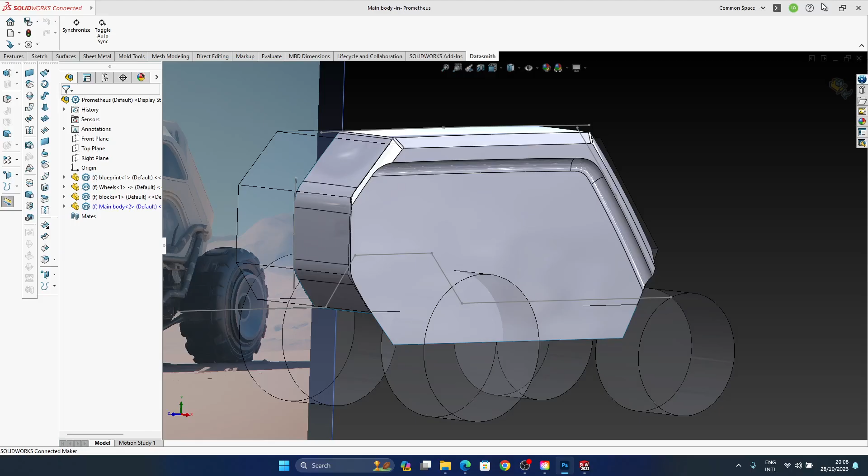So last time we arrived to this point and I was talking about adjusting this thing so that, well, it looks a bit more like this, at least as a main shape. If you don't know how we arrived at this, then check out my previous videos. Today, the main goal would be to get close to the shapes that we have here at the top, with probably a kind of a fillet here, and generally speaking, creating the overall shape to be more or less like our object in here. And we will continue adding more details, more features to it.

And if you would check my previous videos, you would know already that the goal is to get to something similar to this. But of course, I will delete some bits that don't make sense, like these things in the front, some cables on the exterior of the vehicle. Stuff like this I will eliminate, but the goal is to apply our knowledge to create some interesting shapes and to really look nice and to render it afterwards.

Right, so without talking much about the overview, last time we were here, and I remember I finished it with SolidWorks blocked. It managed to unblock itself, which is great. Let's start to do some things. Let's look over the image and try to understand a little bit what's going on. So please forgive my drawing. I will draw with the mouse, so it's not going to look really nice, but it will be sufficient for us to understand what's going on.

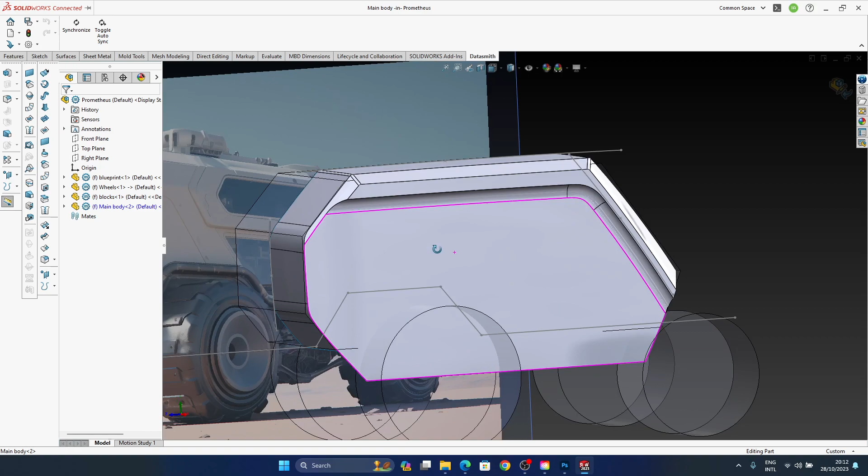Now, I would say that the easiest thing to solve would be the fillet. But the idea behind everything that we've done until now is that we have created some sort of a system that we can modify easily so we can arrive to our goal. That was the whole reason of spending over 2 hours to create a system that will allow us to alter this object within limits, of course, but still be able to adapt. So we don't have to keep reconstructing geometry every time we see that something is not good, especially given that we have one sketch done by AI, nothing from the side, nothing from the top to guide us. So it's very critical to build such a system so that we can modify easily.

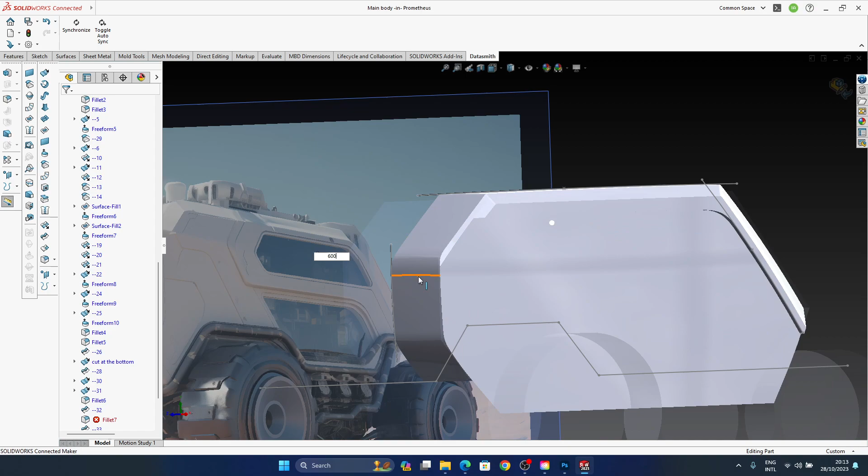Right, so then let's start with the fillet. I think that would be the easiest. So we have a fillet that is at 300 millimeters right now. If we try somewhere around 500 millimeters, as you can see, it starts already to update. I don't think I will keep it at 500, so I will try 600. At some point it will break, of course. Now look, it's clearly not even 600, so 500 will be our limit.

We could get into it and modify. Actually, I think we can modify it, if I remember correctly. So if we apply a freeform modifier to it, and we say this is movable, this is in contact. I think if we keep everything in contact, but we put this one to be movable, then we can modify both tangency handles that we have in here. Oops, SolidWorks does lose the selection. So we can modify the tangent handles in there. We don't need a lot, just slightly, and it should keep the volume nicely.

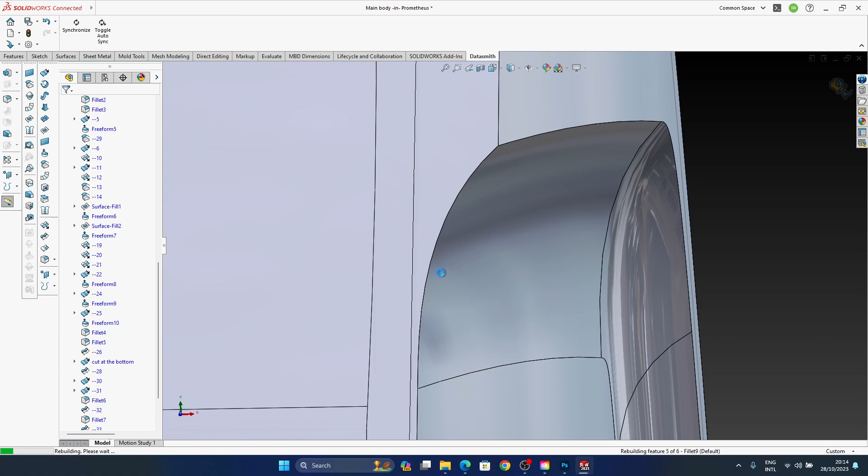Now, even more, I'm just pressing Ctrl Z right now. So even more, just want to be sure, if I am keeping everything in curvature in here, and that should be contact indeed. That is correct.

And yeah, and movable. As you can see, it will allow me to modify only one tangent handle in here, which is still useful in the end, because we can always modify the way that it is fading towards the other one.

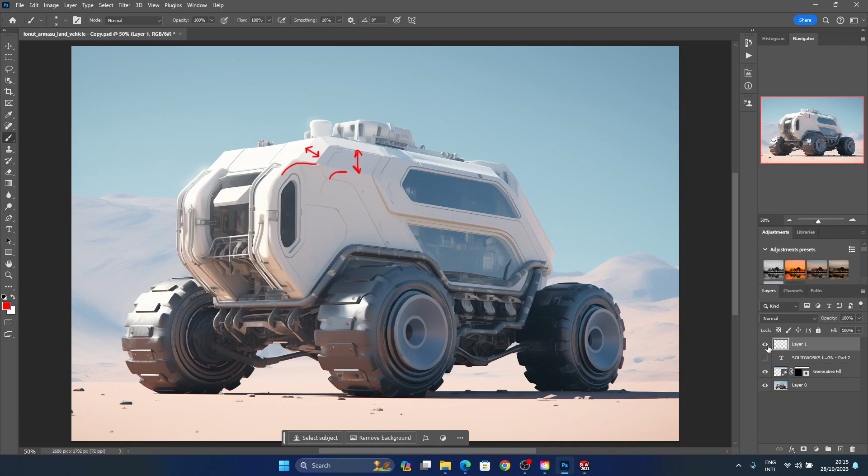However, because this may not be what we need, and because I don't necessarily need such a degree of control, I would just leave it as it is at 500 millimeters as a fillet. I think I went back to 300. Too many Control Z's. Okay, so I'm quite alright with it, especially given that we are quite loose in what we try to achieve.

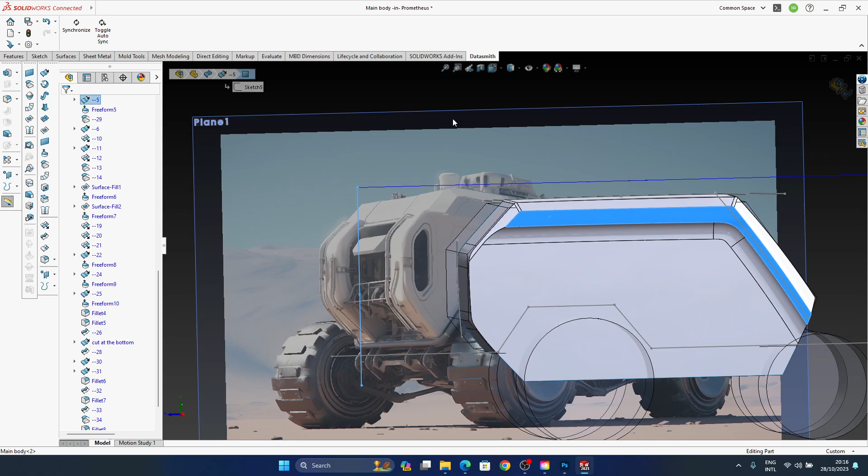Right, so we don't know exactly what is happening in this area here, so we will be kind of free to do whatever we please. The only difference is that we need to make sure that this height in here is what we need. So let's try to get that one done. I remember that the height was governed by an extrude. Yes, so I should have an extrude from which I created this fillet in here.

So let's see, we have the fillet. So I should be able to see parents and children. So one of them, there you go. So it's extrude 30. All right. Oops, not help. Okay, extrude 30. Anyway, so then I have the sketch in here. I will go into the side view of it. I could just modify the sketch.

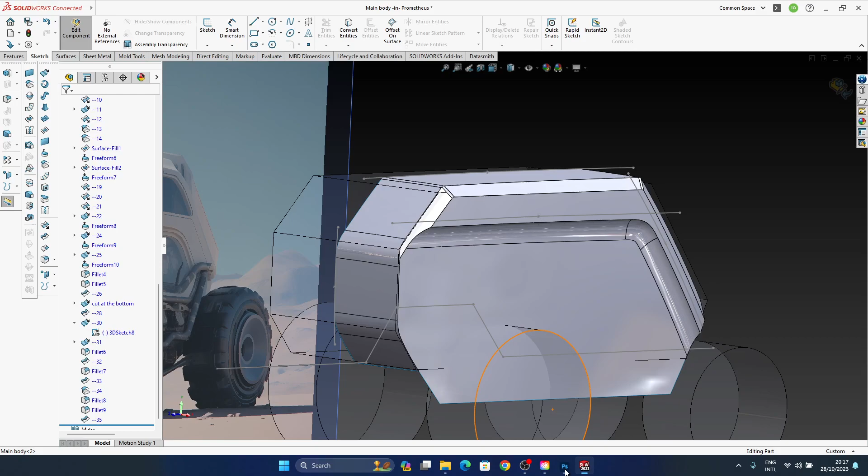Yeah, so I'm going to modify the sketch that I have in here, and I need to make sure that I have a distance that is wide enough. It doesn't need to look exactly like that, but the idea is to be closer to what we have in there. So I would say that this kind of width I'm okay with. It's not perfect, but we don't know the dimensions, we don't have all the views to work with anyway. So definitely this kind of height in here is what we need.

But because of that, this fillet in here goes quite close towards this fillet. So that's not necessarily what we wanted to have. So if I'm going in here, it's extrude number 2. And if I'm modifying this, I should be able to now modify this curve. So if it is too close, then the angle of this curve should be a little bit more abrupt.

Okay, not now, please, Mr. Bitdefender.

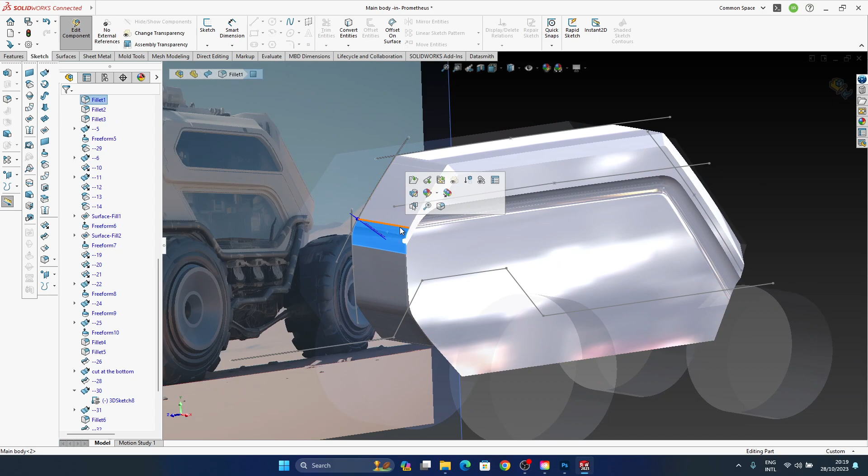Right, so it should be a bit more abrupt. So now by modifying the angle, our fillet is not going so much into this front fillet in here. And by the way, when you have the light hitting the object, you will not perceive this fillet starting from this edge here. So I would say I'm okay with what I have in there. Everything is kind of loose anyway, so as long as we achieve something similar to what we have in here, we should be good to go.

Now, the third thing that I have is this one in here. Okay, let's name it 3. All right, so that would be the third thing that we have. Now, there will be 2 solutions. Either we increase the offset, but that means that we start eating even more from this fillet in here, and I don't like what's happening in here. I don't like this kind of shape. I would like to have a clean shape, not something like this. That's kind of nonsense.

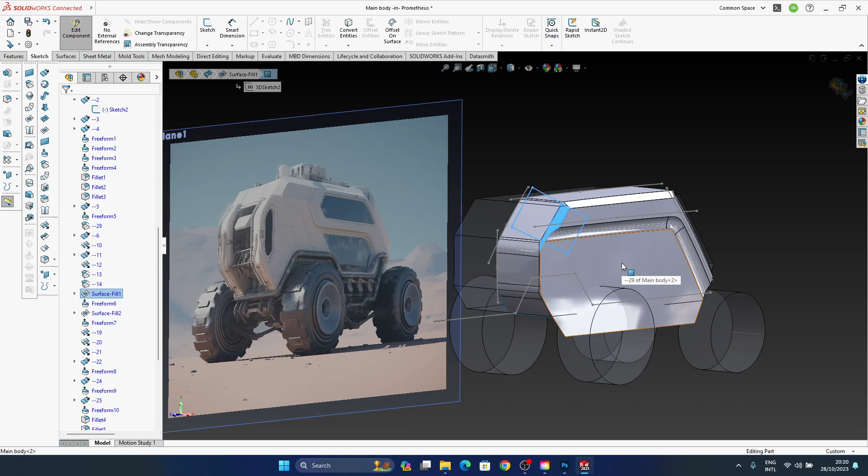Right, so we can increase the offset, because all these surfaces for doing the chamfer are governed by an extrude and an offset as an origin. Or we can modify the angle. The original surface that we extruded in the past had an angle to it. So I remember that I just applied 45 degrees.

Let me see, I have a surface fill, so we should be able to just reduce the angle of it. Okay, so if I'm saying in here, parent, then, oh, interesting, I cannot see. I have a 3D sketch, yeah, I know that. So okay, I found the offset, so we are at offset 13, there you go.

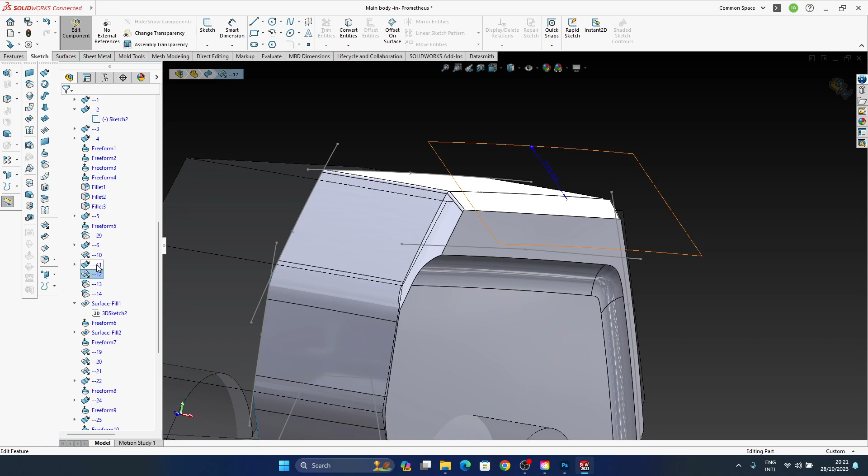Yeah, so I'm having the 2 offsets that I have in here. I'm trying to remember. 2 days passed, and I struggle to remember. So I'm having the 2 offsets in here, whose inputs would obviously be the extrudes. So I have this extrude in here.

So I should be able to see an angle to it. Oh no, that's an extension. This is the extrude. Yeah, good. So I have this extrude in here, 45 degrees. I would say let's reduce it towards 35 degrees. So 35 degrees, and of course it's eating more from what I have in here, but that's fine because then I can reduce the offset.

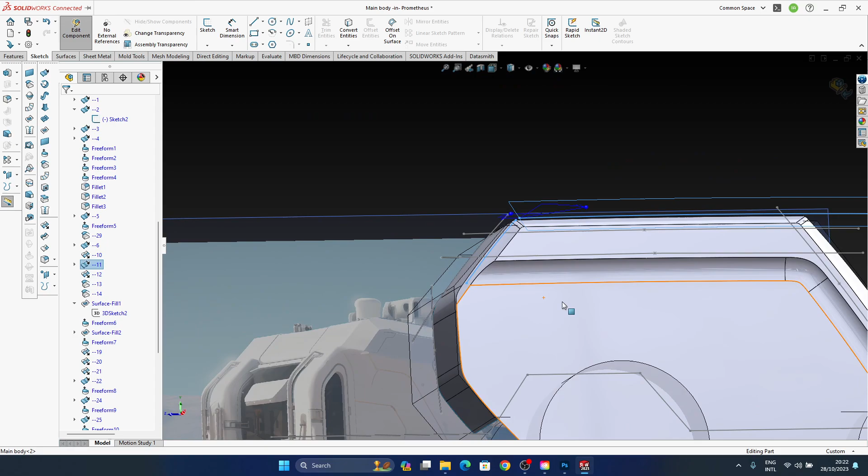Okay, so 35 degrees, I'm not sure, maybe 30 degrees would be a good idea. Maybe we can keep it at 30 degrees because at the end of the day we can always go back and modify it. That's why we have constructed our system in here, so we can modify this without a problem. So 30 degrees on the other surface as well, and there you go. That's cool. So we start to have that wider kind of chamfer in here.

That's good. Now, if I'm offsetting these surfaces back so that I can reduce what's happening in here at the corner, then I'm going to reduce the chamfer. Yeah, so I don't quite like that. So then the only option that is remaining in here would be to modify the offset of this thing. So I would say, I don't know, 180 millimeters. Okay, 180 is not quite it, I don't want to reduce it completely, so I would say 220 maybe.

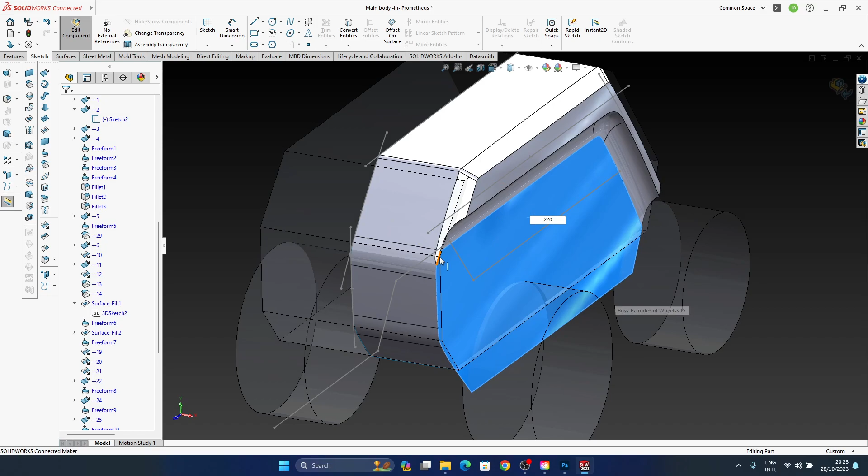Okay, so maybe instead of having it at 30 degrees, maybe I can put it at 35 instead of that. So it's, you know, a combination between the two. Okay, so that gave us this up to here. Now I could create fillets separately and blend them, but that's quite a lot of work for such a geometry, so I don't want that kind of work.

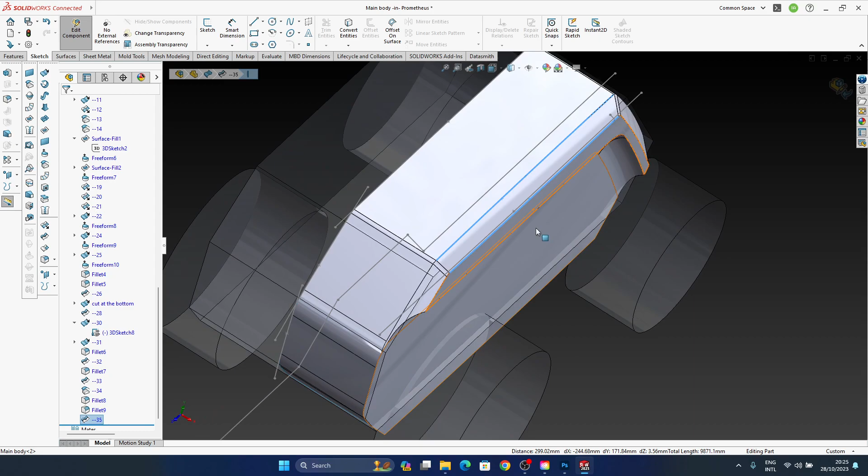I just realize these two curves in here that are going away from each other, so probably we will need to address this to be less visible. But anyway, just continuing with what we have, I don't like the fact that it is finishing in here. I don't want to work so hard for such a surface. So then what can we do is, yeah, increasing, so it will be all three options adjusted so that it is not going to affect us that much.

So 150, I would say in here, maybe 130. So just enough to avoid this in here. 130. Okay, so now it finishes in here, which is what I wanted. I have more or less a wide chamfer in here, not as wide as maybe we wanted.

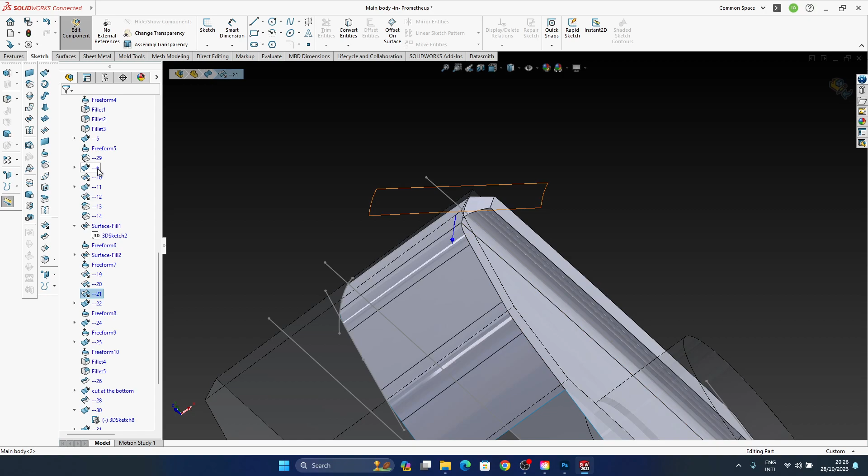I'm just thinking, could I maybe make it wider? Instead of decreasing the angle, maybe increasing it. So the angle is good, but then, yeah, I think we can actually do it. So by decreasing the angle, like 25, for example. I see. So it's the other way around. Okay, so by increasing the angle like 65 there, and then making a bigger offset, yeah, it will give us what we need.

So now instead of 130, 160. There you go. So 160. Okay, so now I think we are exaggerating. Let's see, where is my extrude? So this one, so 65 is a bit too much, from 45 to 65, so 20 degrees, so no. How about 55? Yeah, so 55 looks a lot more like it.

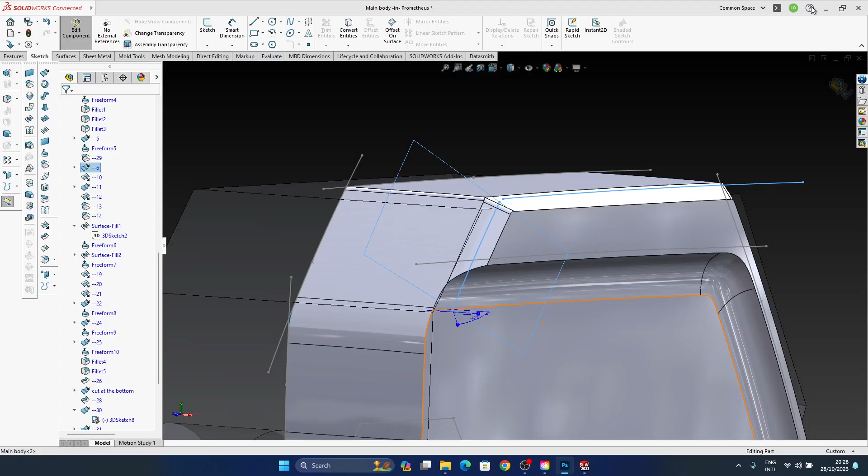And now, well, it's a matter of choice in the end. So now this one I can keep it as it is, and then I can keep this one as it is now, or I can do something slightly different. Yeah, let's do something a little bit different. So instead of, I think I was having 55. Was I having 55? Let me see. Yeah, so 55. We can keep this one at 45, for example.

Not even sure which one it is. I think, yeah. So we can keep this one at 45. Let's see. There you go. Now, of course, these things don't align anymore. So that means that I am forced to increase the offset. Probably 150. So I may go back to whatever I was having before.

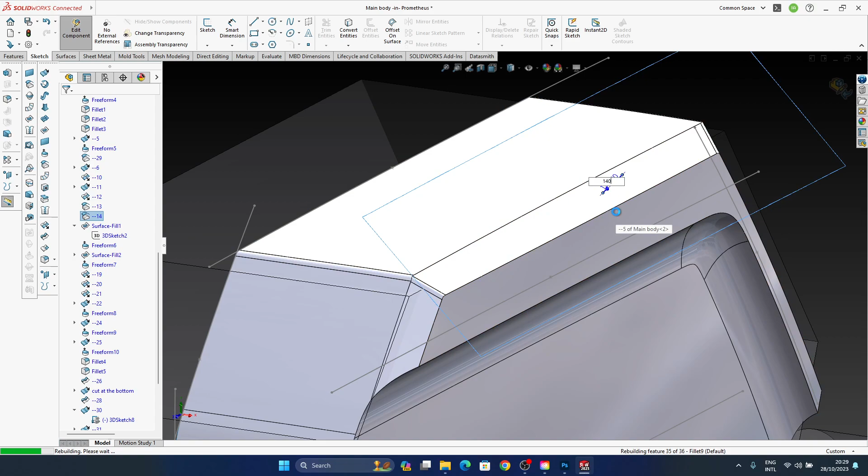I want these two to match a little bit better so that I work less later. So 150, 140. Okay, 145 then. Okay. Yeah, somewhere right there in the middle. And there you go. So now they would be at a different angle value. Yeah. So in this way, it does look wider here. It does look slightly wider there, just like as it would be in the picture.

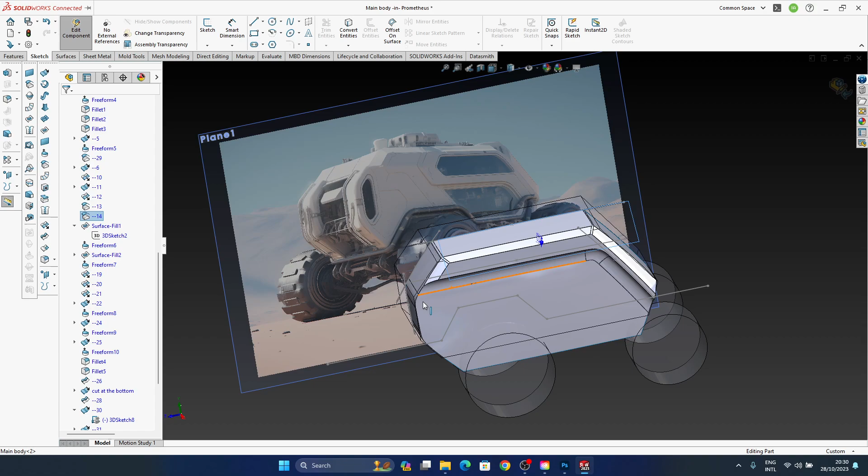Of course, now we need to adjust some things here at the back. But that is the power of creating a system, as I was showing in my previous videos, especially when you do not have a lot of sketches to support the work that you're doing. And honestly, if you receive from a regular normal client a small job for a product to be done in 3D, for example, if you receive like 3 sketches, front, side, and top, you should consider yourself lucky.

Most of the clients and anyone really, unless you put a lot of work into all this, you wouldn't have more than one sketch, one idea, one drawing, and you will have to do from that a 3D model. So given how it is, I would say having a system like this is imperative.

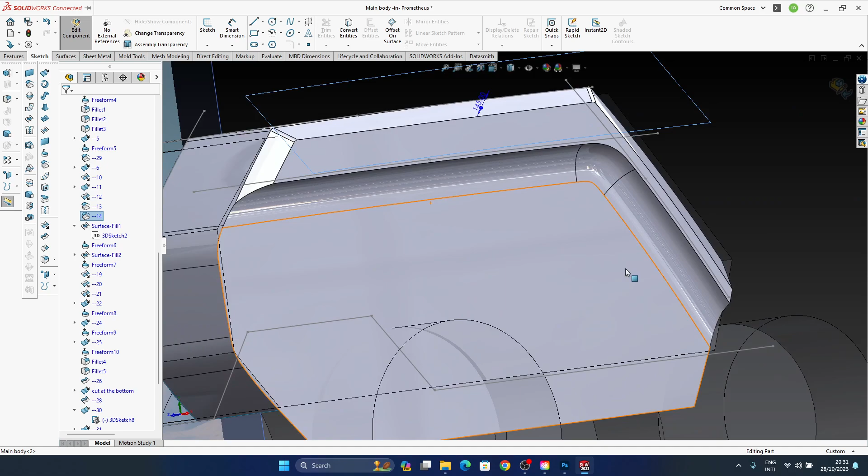Right, so what was at the back? At the back, we don't know because it's free for interpretation. That's fine. But I will want to have something different than whatever I have in the front. So yeah, I will come back to this later. I may still not like what's happening here, but anyway. So what I need at the back, first I want to look and see around the angle. Yeah, okay, kind of all right.

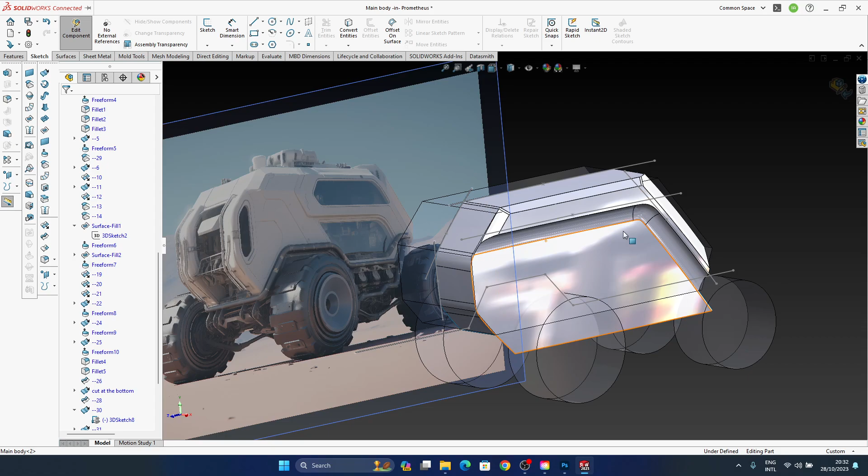Yes, I'm on a surface in here, so it's not going to work very well. All right, so let me modify this in here. Just slightly more, and I think I want something like that, and I want to extend it just in case. Okay, right. So at the back, I wanted to have something different, maybe a bit weird happening so that I can experiment a little bit. All right. So that would be the first steps, the main kind of object in here.

Now we need to create this feature in here for the window, which will be in continuation of these surfaces that we created earlier. So that would be one thing. I will do the cuts later on. So the cuts will be the last things to do. So we have this. Yeah, so I think we can start constructing this kind of feature for the window in here. Again, just checking the time.

Yeah, so we have maximum half an hour at our disposal, and in that half an hour, we can first look at how we can manage the fillet in here, and then look at this feature in here. What should we do? I think we can actually construct them separately, given that we don't know yet. No, I will not construct them separately. That will give us a lot more work afterwards. I would say let's continue.

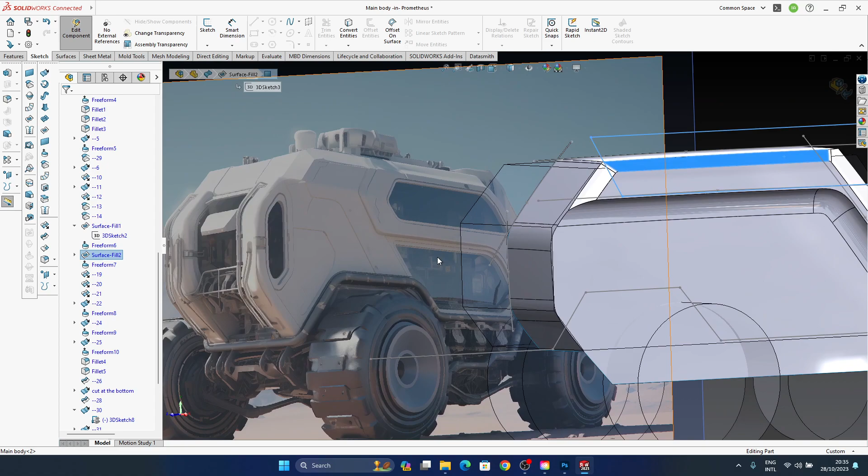Yeah, we just create some extrudes, and that's kind of it, really. I mean, we will just need to use the same things that we have in here, maybe, and we will have to use them without the fillets, so that it will flow continuously. Yeah. So then let's erase. If we erase the fillets, can we do it without? Yeah, I think we can, because anyway, this would be like that.

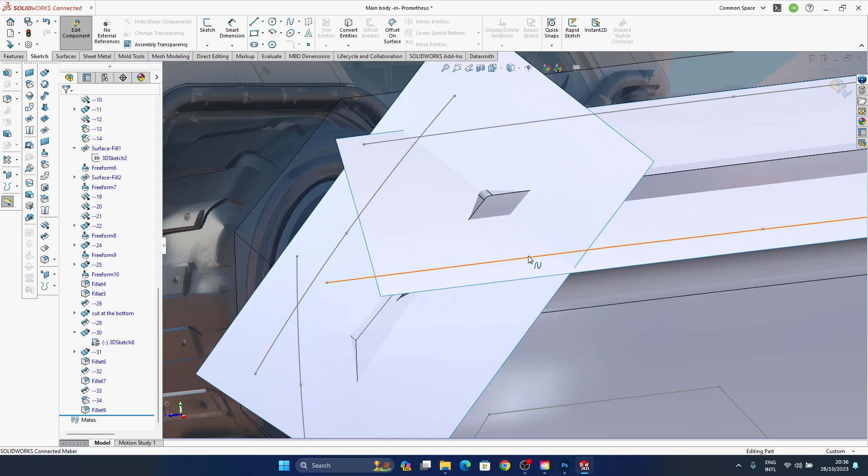Yep. So we can always remove all these, build the other feature that we need, and then make the cut. Yeah. So I don't want to mingle the fillets around. Okay, so then we have this feature that is continuing from this surface.

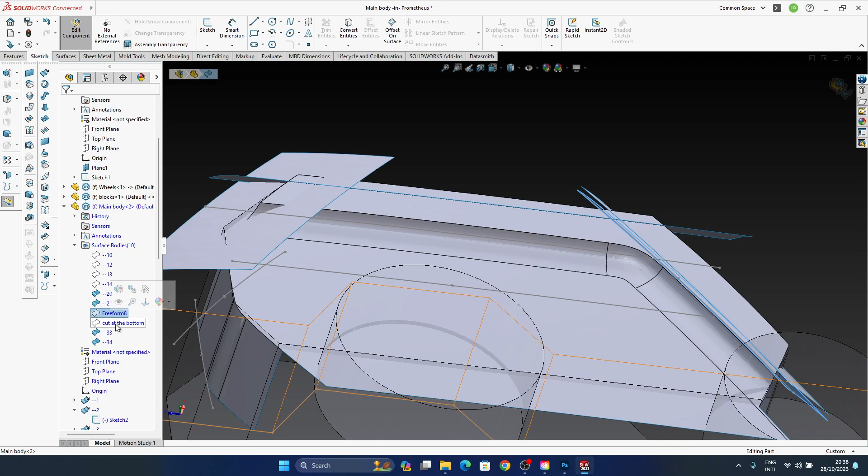And we don't need it to be raised a lot from the original surface. So we had this, and then we had the freeform. I just want to make sure, actually, we can go to surface bodies, and I should have it in there... no, I don't have it.

Okay, no problem. So we will make an offset of that original surface, yeah? So we should be at surface 5, freeform 5. I think I can say freeform 5, roll back to freeform 5, which... okay, so freeform 5 is my surface. Yes it is. So annoying that it does not select it like that. Anyway, so let's make an offset of the freeform 5.

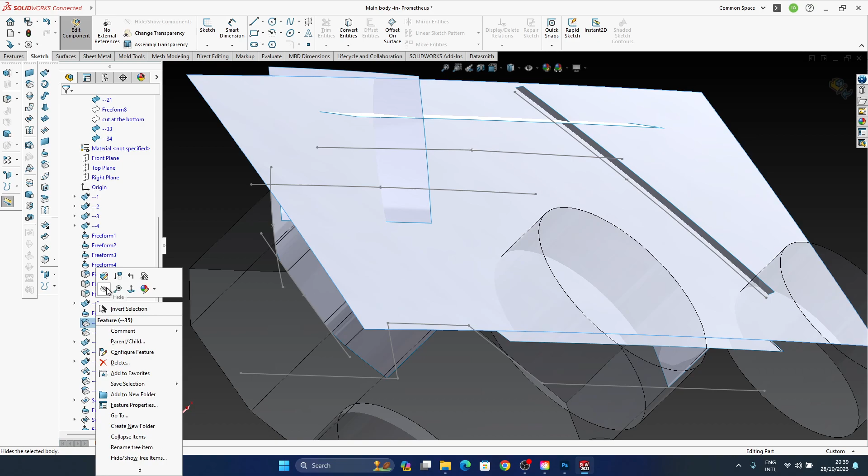10 millimeters. It's a large vehicle, but fine. Okay, just checking, yeah, it is in here. Come on, offset 35, where are you? Okay, let's make a filter offset. It's a filter in the whole assembly because I'm not in part mode. Okay, 35, cool. So if I'm hiding offset 35, yeah, I'm okay.

All right, so now, how I was thinking to do it, yeah, I was thinking to use the offset that I have in here, blend it with everything that I have. Okay, so that means I would delete those fillets in there.

Actually, I don't think I needed to remove the fillets. I could just keep the fillets in place because at the end of the day, I'm using it like this. Just thinking what would be the best way of building this. Yeah, I can always keep the fillets, most probably.

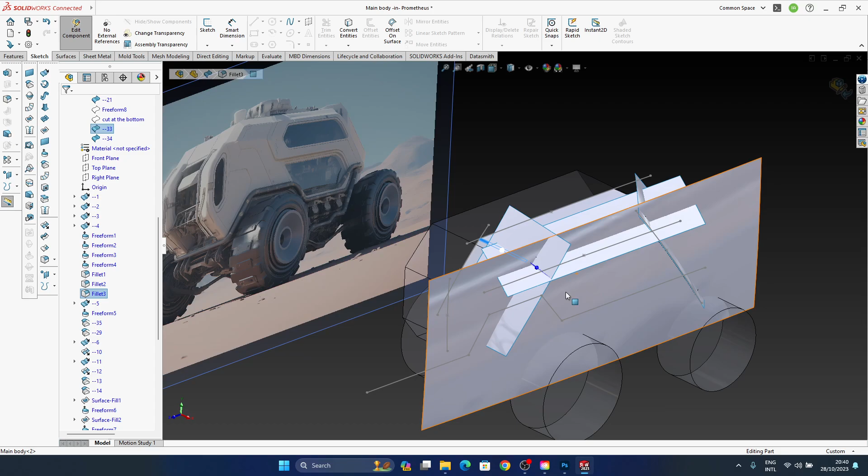Anyway, well, it's not something that I kind of planned for it. It's not pre-recorded, so don't imagine everything is perfect.

Right, where am I? So I should be somewhere around here. And I want a 3D sketch, and I will want a spline on surface. Yes. And again, I'm looking, okay, so it's something like that. Somewhere I don't see it, but if I'm hiding the surface, I will be able to see it. Okay, and something like this. It doesn't really matter, I just want to have all the points on the surface.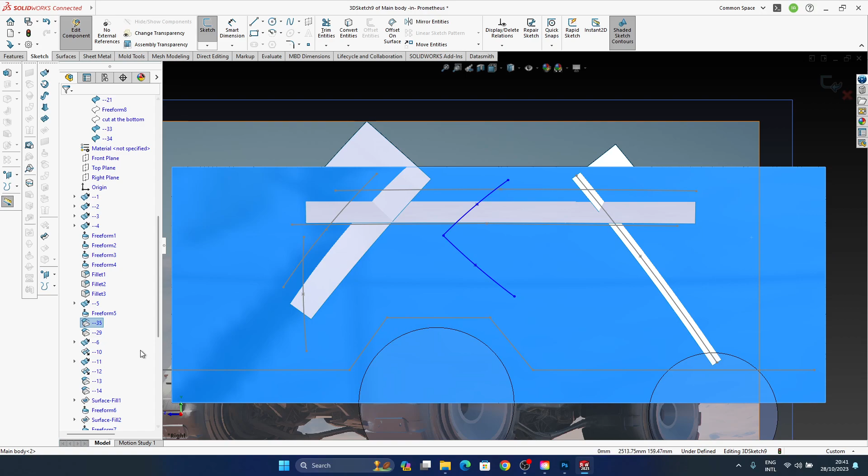Okay, so now if I'm hiding this, okay, so it is exactly here on the edge of that fillet. So if I'm moving this somewhere here, they don't necessarily need to match perfectly, but I can always project that or convert entities, make it to be a construction line. Yeah, construction geometry, good.

And now I should be able to... okay, smart dimension, okay, that's interesting, because I am in a 3D sketch on a surface, so it may not know. Yeah, it may not know what I am doing here. Okay, let's read this.

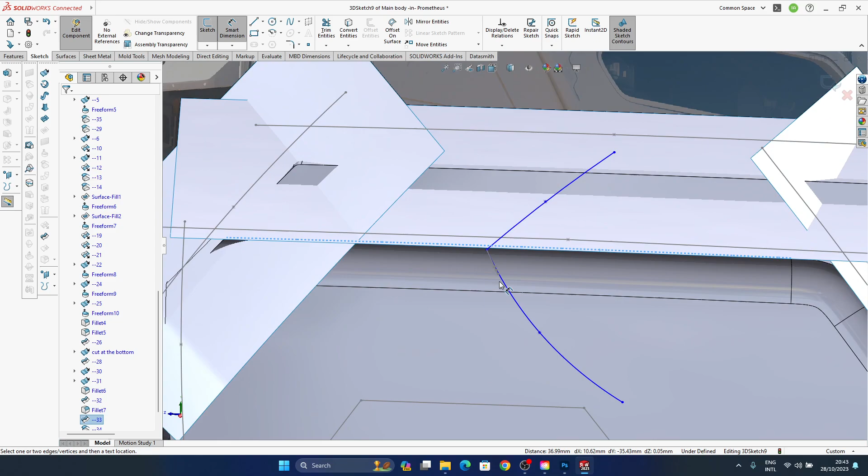Can I? Okay, so I can have an intersection curve. I don't really want that. Can I maybe have a smart dimension then? Yeah, so I have to, okay. So theoretically, I will have to find a way to project onto the surface, which would be as an intersection with others. Well, it's too much hassle for such a small thing anyway.

So what I'm going to do, oops, I'm just going to match it just to be somewhere around there. Okay, and I can see that would be somewhere around where the wheel, just after the wheel would start as a dimension. So it wouldn't be so far back. So our little buggy in here may be too short. Let's see, let's put this somewhere. Okay, so it works enough.

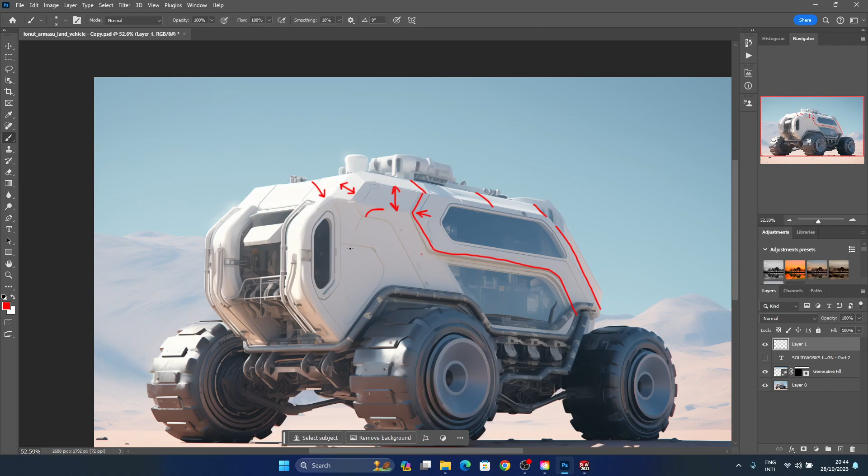Let's put this somewhere in here, and just putting these points to be on more or less wherever I believe they should be. Okay, so it would be clearly there, somewhere where this fillet would start. Yeah, so it would be somewhere here. So clearly it's shorter, not so high. I'm just checking to see where my fillet is starting.

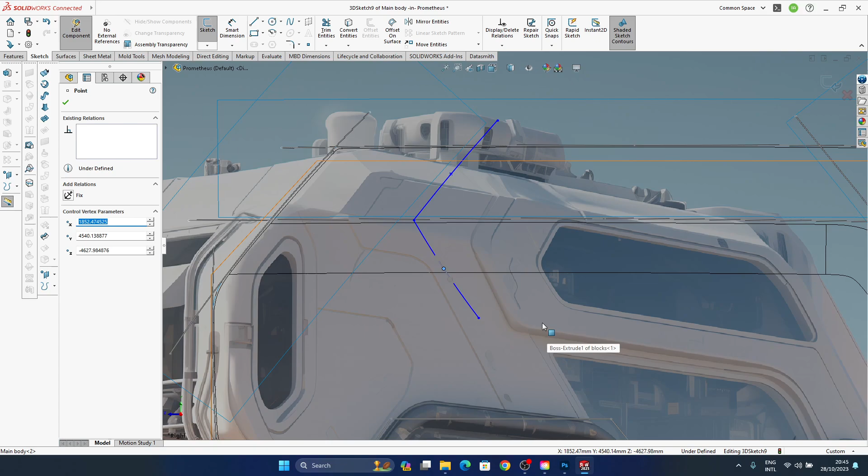That's the drawback of having these surfaces untrimmed, isn't it? It's not very easy to see things. But anyway, that's why we construct everything in such a way so we can adjust afterwards. Now, I do see these as being at the same angles, but this I see it a little bit more like that. Okay.

So now, just readjusting as I don't have trackball rotation. So now what do I want? Well, now we want to extrude this along a plane.

Just going to the part where I want to be sure that I'm having the right plane. Okay, come on.

There, good. Do I want it at an angle? I would say yes, if possible. I don't know, 5 degrees, for example. Do I want 2 directions? Yes, I do.

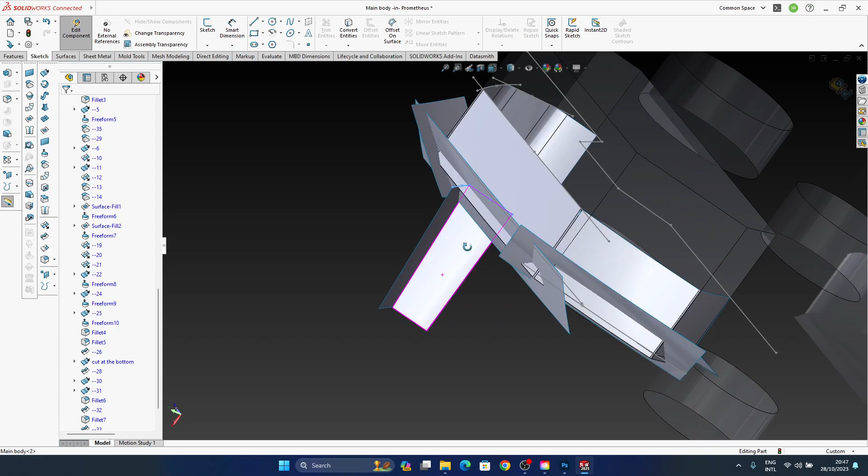Yeah, and now he will say he cannot do the things. Okay, so if I say draft outward like that, it still didn't do the other part of it, right? It didn't, no. Okay, well, we can do only as much as we can do.

So I would say no direction 2, we leave it at 5 degrees, and we can always extend this thing anyway. We'll have to match it, yeah, because it's on the surface we cannot really match it so easily. Right, not a problem. We can always readjust the sketch after everything is trimmed, so that shouldn't be a problem.

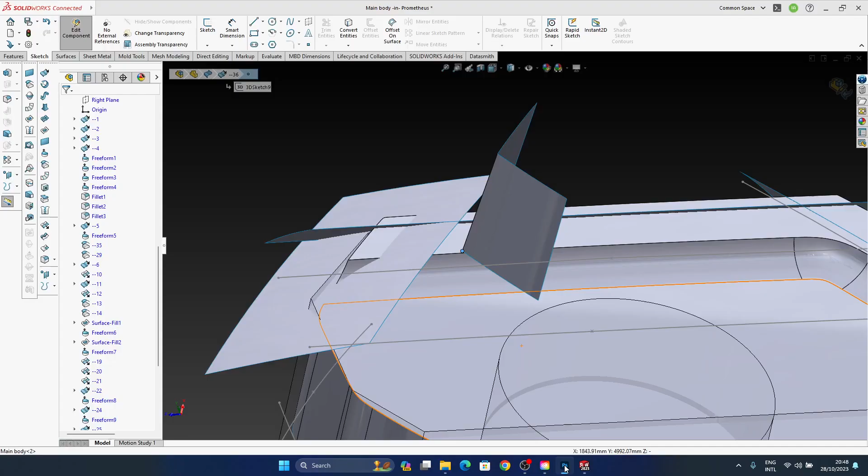So I do this, and then I am going to trim everything with the feature. Yes. So then, indeed, I need to extend both sides to make sure that it does intersect with the other object. There you go. So that's cool.

I just want to make sure that it's the same surface. Yep, that's good. So now I'm having this offset. Let's see how it is. Okay, so here I'm having two of them like that. Yeah, okay. So let's do the other two.

By the way, I just realized that, well, actually, I can always put that one low because I'm going to have another set of surfaces in there. Or I could use the same sketch. Now let's try. Let's use the same sketch.

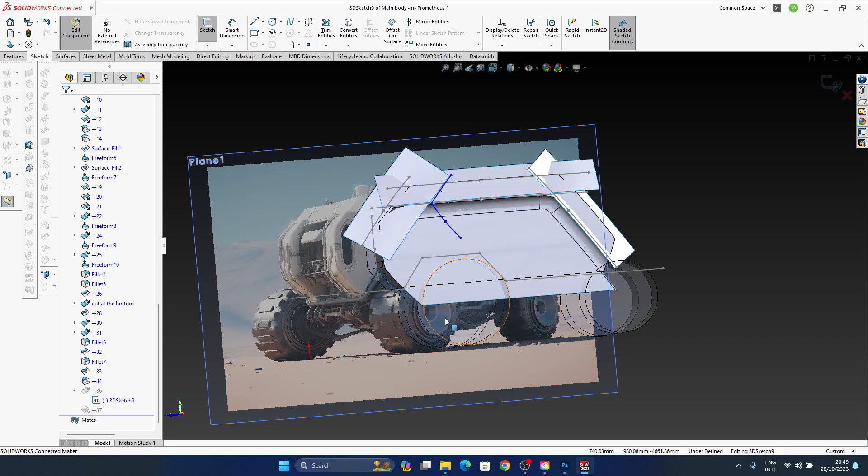And it should be on the same surface, which is that offset 35. This one, yeah. So let's put it back more or less where it was. Let's make another spline on surface, up to here, I don't know. I will adjust it afterwards.

And then what do we have? So then we have this in line with the other. Okay. That's not too bad. So let's put again a spline on surface, and again like this.

Okay, good. So now it is 5 degrees all round, but we need to extend it. So I will go to this extension here and select the other edges that we have in here. Oops.

Solidworks trackball rotation, please implement that. Okay, so now I have this. Just checking the time. Okay, so roughly 15 minutes left.

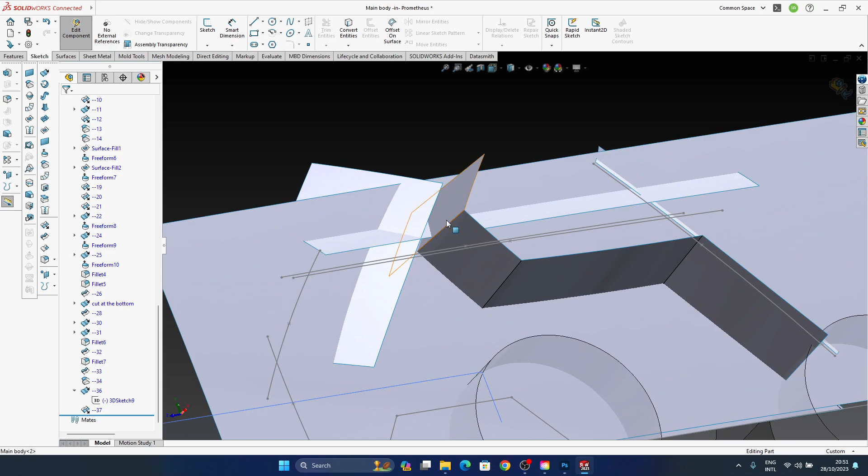So I can just start making the trims so that I can use with this. Now the only thing that I'm not very sure about is if I want to keep this separately from that chamfer here or not. And I think I don't.

I want to use this, for which I was creating the chamfer before, only after I'm building the other feature. Now that I think about it, I think it's better that way. And if I do it like that, yeah, then I can use these surfaces in here as an input for it.

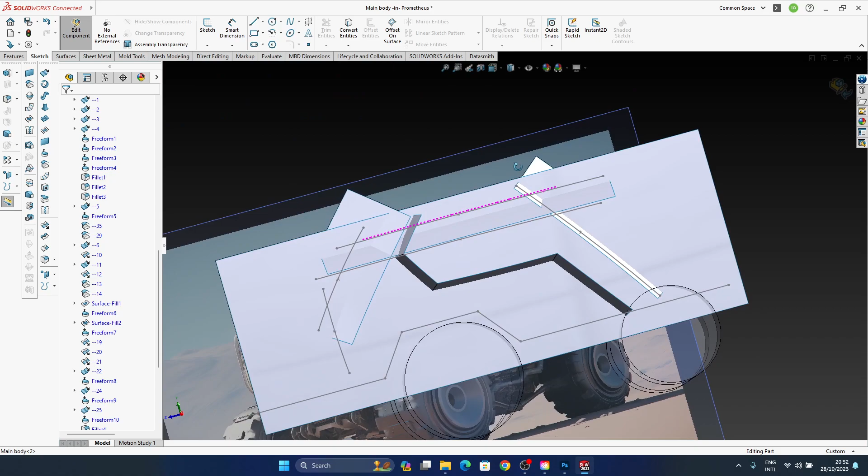Okay, let's do something first. There are many ways, I'm just thinking which one would make us work less, right? So let's do the trim mutual between this one and this one, remove this and remove this. Yeah, okay, so that would make this.

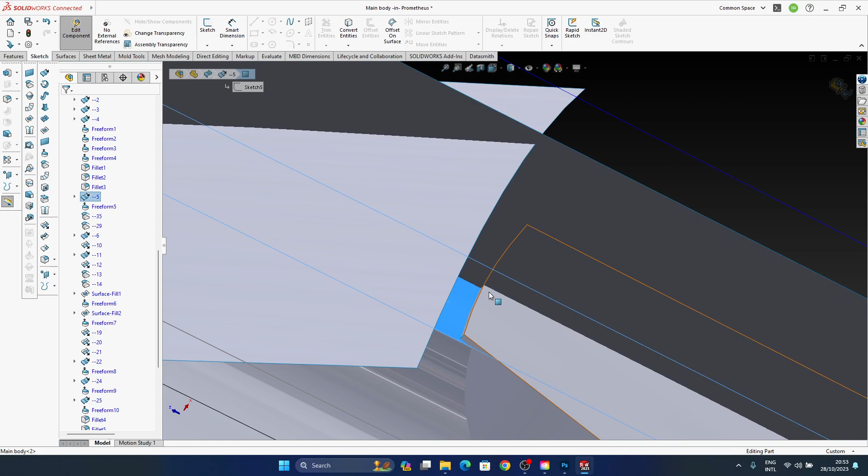So now, if I am, there you go, 10, yeah, so 10 millimeters in here. I don't like the fact that afterwards I'm going to have a step. So definitely I don't want that. So I will just keep

0 for this and just make a copy. Okay. So now they would be all at the same level as the surface. That's the reason why they appear like that.

Okay. So I kind of start to see where I'm going with this. Which interestingly, and I didn't test Solidworks to see if the surfaces are one on top of the other, being identical, is it able to recognize what's going on? It would be very interesting to see.

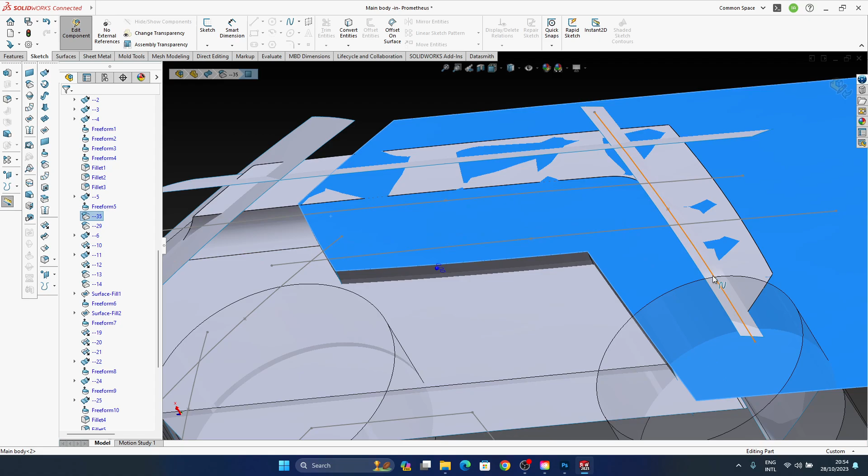Or no point to even try to do that, because we can always use this fillet surface that we created before as an input to just cut through. Let's try the first idea though, because I'm curious about how Solidworks thinks about this stuff.

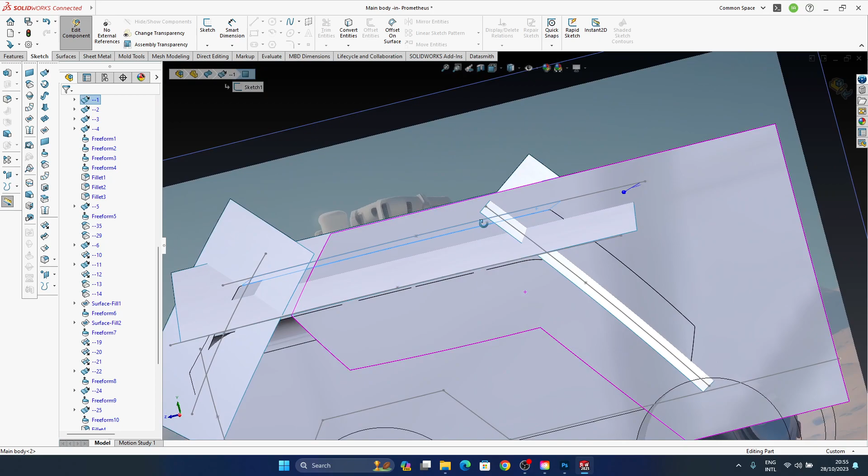So I'm having the same kind of surface, and now I will want all this in here as an offset so that I can cut through it. So I can do that, yeah. I'm not sure if it will recognize it.

Okay, but actually we do have a step in there. Okay, well then, let's make the step, but let's make it more obvious. So instead of 10 millimeters, let's try to put like 50. Yeah, so 50 millimeters.

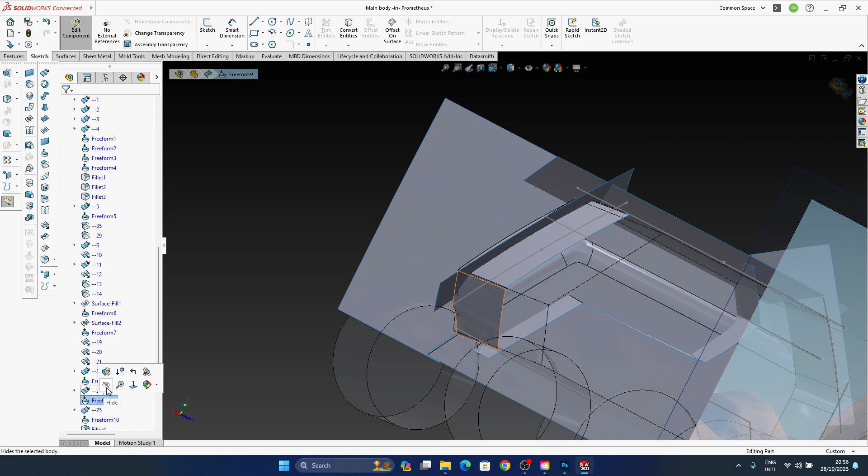And now, yep, let's use all these inputs that we have in here. Oh, my bad. We should be able to create offsets from these and use them.

Yeah, okay. I don't want to extract and extend. That's a bad idea.

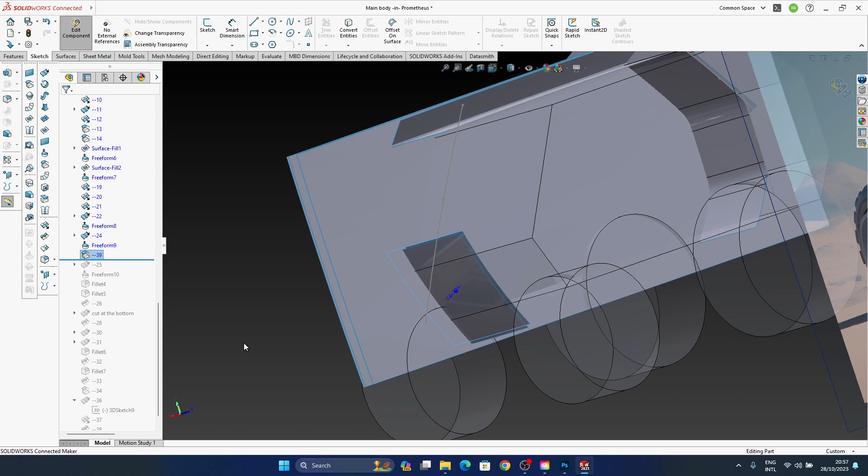So, yeah, fine. All right, let's make the offsets then. I'm going up to here and I say, okay, roll back. I want an offset of this. Initially I'll put an offset of 10 millimeters. Actually, let's put an offset like 100 millimeters just to make sure we see it correctly.

And where is the offset? That is the offset, isn't it? So I think it is, yes, it's on the wrong side. Okay, so the opposite direction. Yeah, next surface, next freeform.

All right, let's go in here. Let's make the offset another 100. Yep, good. So that's that.

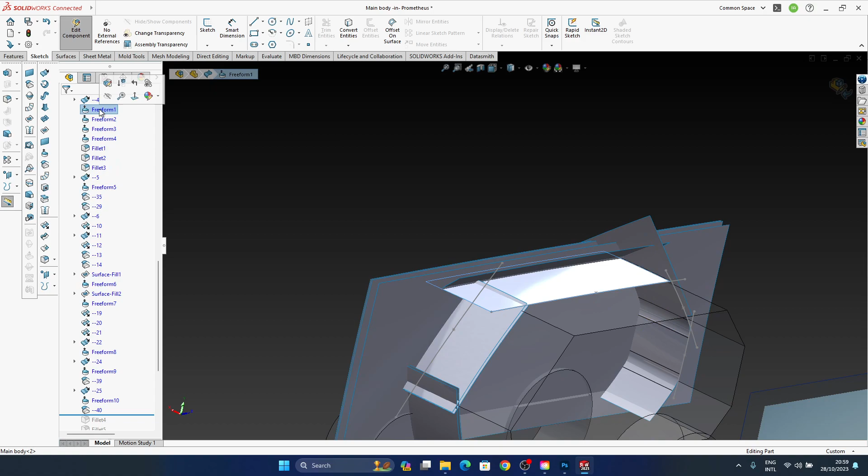And then what do I want? Do I want it as well from here? Yeah, let's try to do that. But for that, we need to see which freeform it is. Yeah, and it is that one in there. So if I go into the freeform one, let's make an offset 100, and that's it.

Now let's roll back, roll to the end, and I should have all the other offsets ready to use. Good. Now what I'm going to do is keep them at 100 just to make sure I can see them well. And finally I can...

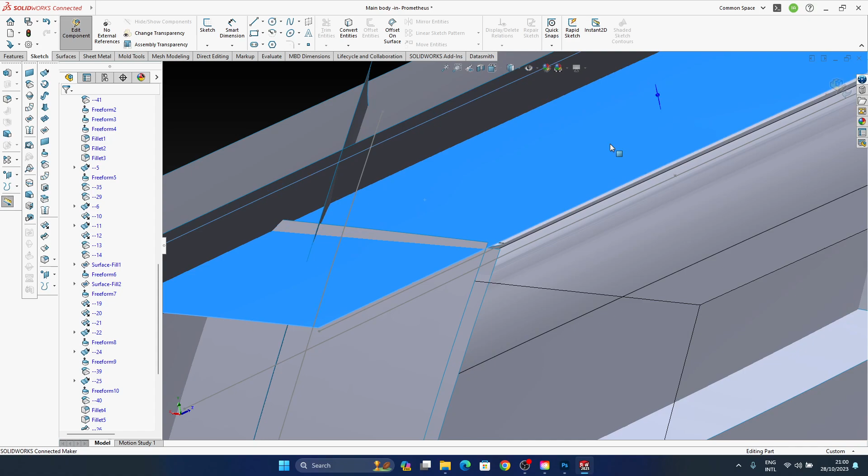Yeah, trim them together and all that. I'm looking in here, 100 is too much. I still want to have intersection. So I'm going to use them just to make sure I can see them. In the end, they would be offsets of 0. Okay.

So let's make the trim, remove this and this. The other trim, I'm not doing the fillets, because I want to see how it will work without them, if SolidWorks is clever enough to recognize the geometries without problems, after making the fills, if it's able to join them together, being basically the same operation.

Okay, so let's join this trim surface that we created earlier with this feature that we have in here. And what do we need to eliminate? Well, we need to eliminate that and this.

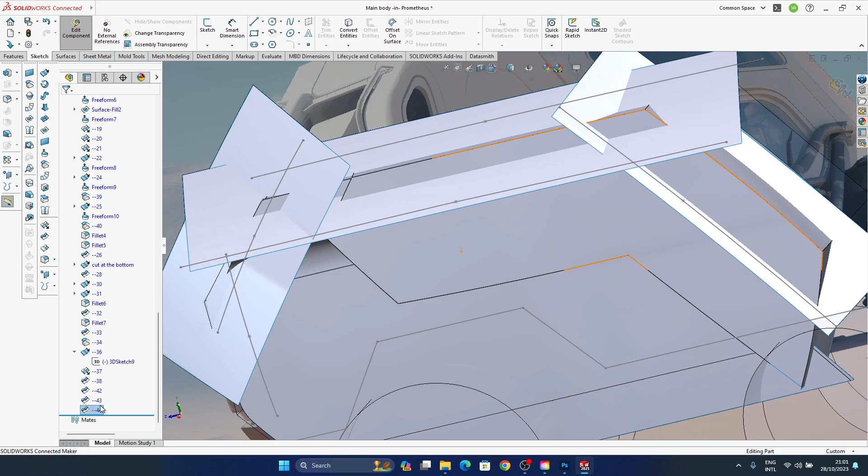Okay, so now we have this feature in here done without any fillets. So what do we need? We need to intersect it with this, with the parent object, isn't it?

So what I'm going to do, I will want to use another offset of the surface, and I just want to use it - or actually, it will be easier to just use an extrude, isn't it? So I'm going to do a sketch on the top plane with a curve somewhere where it should intersect whatever we did before, and for the sketch plane offset, I will want it as an offset.

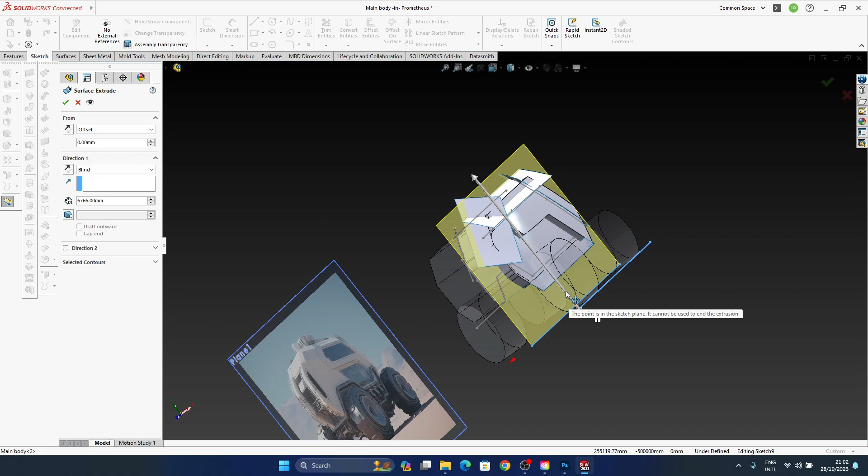Come on. No, I don't want a second direction. No direction either, I just want an offset. Okay, offset 500, I guess. Yeah, fine, so offset 500.

Yeah, and I moved it. So let's move it back. I don't need to be in a sketch to move it back, by the way.

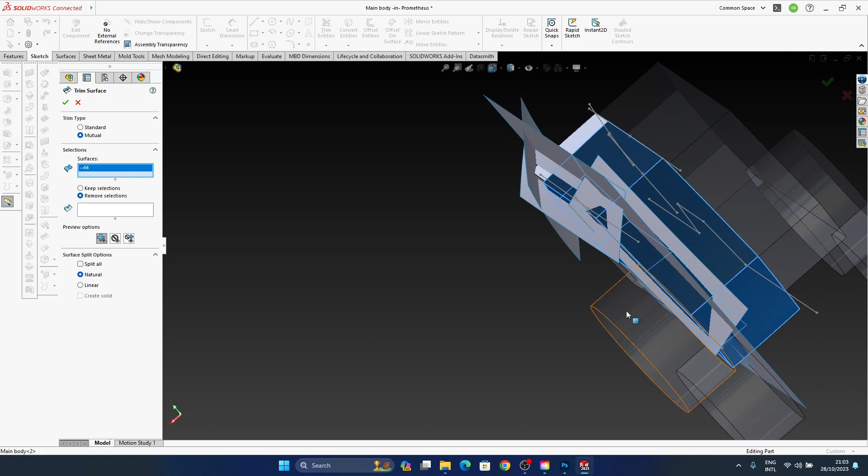All right, so now let's make a trim between these and the plane that I just created, and something doesn't work. What doesn't work? Let's see. Is it maybe too short?

Manifold surfaces. Well, I don't think so. Okay, let's move this a little bit. Oh, I moved something different. Just pressing Ctrl Z to make sure nothing is wrong in here. Okay, so I'm moving it closer. Let's hope that it knows what I'm trying to do.

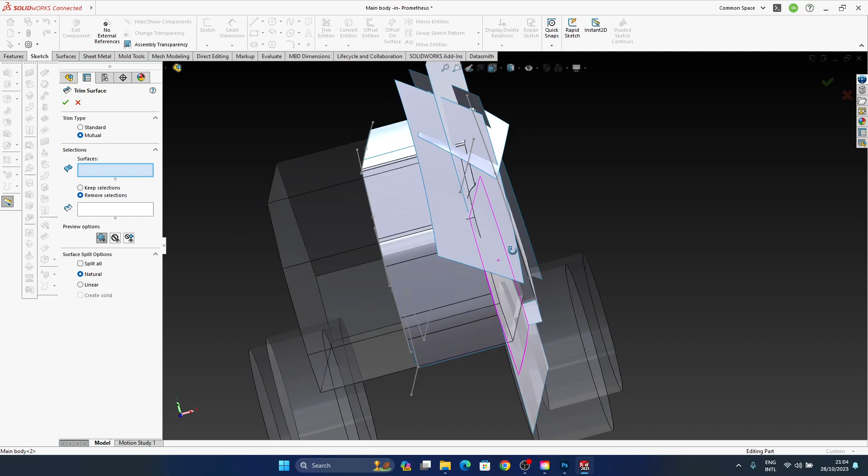Okay, so it should be between these and these, and the things that I want to remove. Okay, so I keep having the manifold thing. Okay, I'm going to do a Ctrl Z to eliminate this completely.

Right, so what problem do I have? Ah, I see what problem I have. Okay, so the problem I have is that this one in here is not long enough to intersect. Okay, so something happened in here because I am seeing this the other way around. It's probably when I dragged some things around. Anyway, doesn't matter.

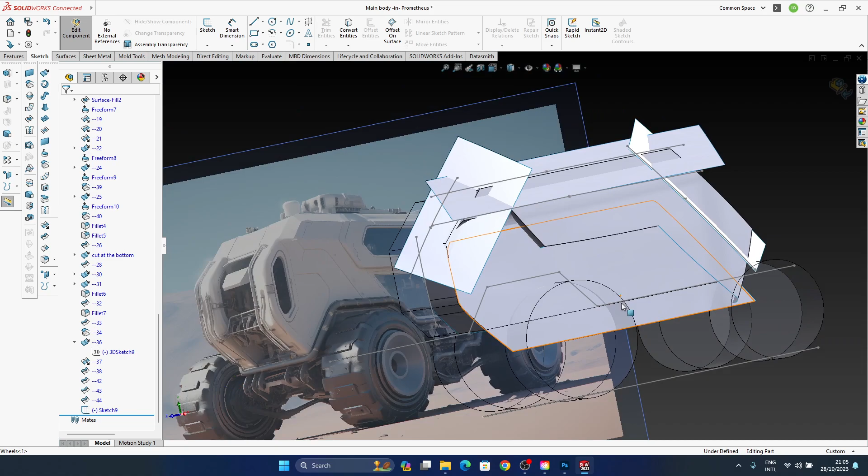Let's go forward with it. Okay, so now if I am building that sketch on the top plane, I shouldn't have deleted it, but anyway. Just going to make an extrude up to the top, and now it should work. No, still manifold something. Well, yeah, because now, despite I modified that, the plane is not there anymore.

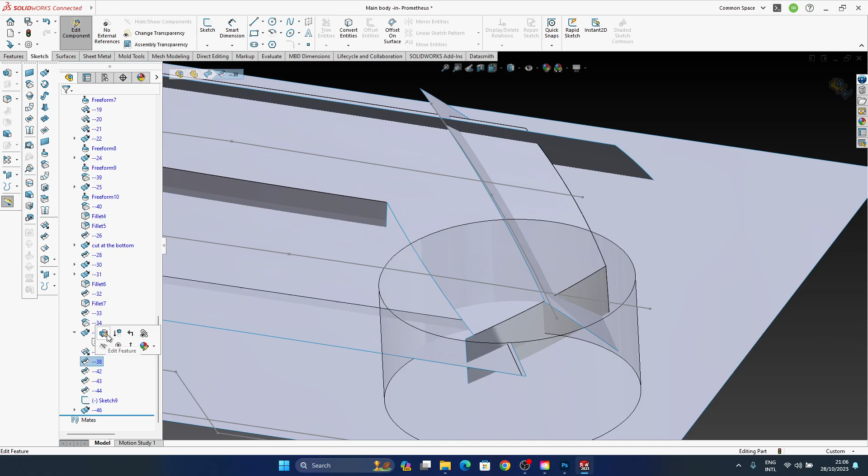Okay, right, so let's do some things. Okay, so I want between this and this, and now it should be. Okay, so again, okay, so somewhere indeed we have a problem with joining bodies for some reason, and we will have to see. Well, and I can see in here it does look like they are not joined for some reason.

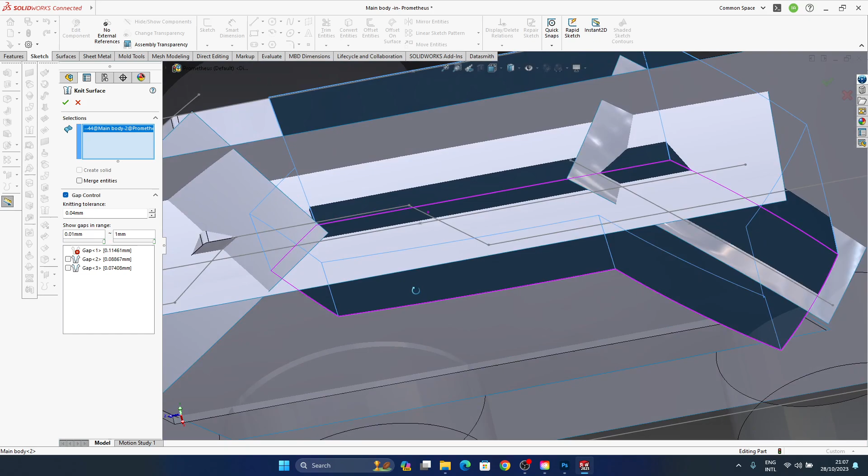Okay, so then how about we try to, yeah, so I can see a gap. So somewhere we have a gap. I don't remember. Do I have an option to heal a surface? I think I remember something like heal surface and trim extend. Let's see if we have any healing. Mesh modeling. Maybe I remember from a different software. I don't see any healing.

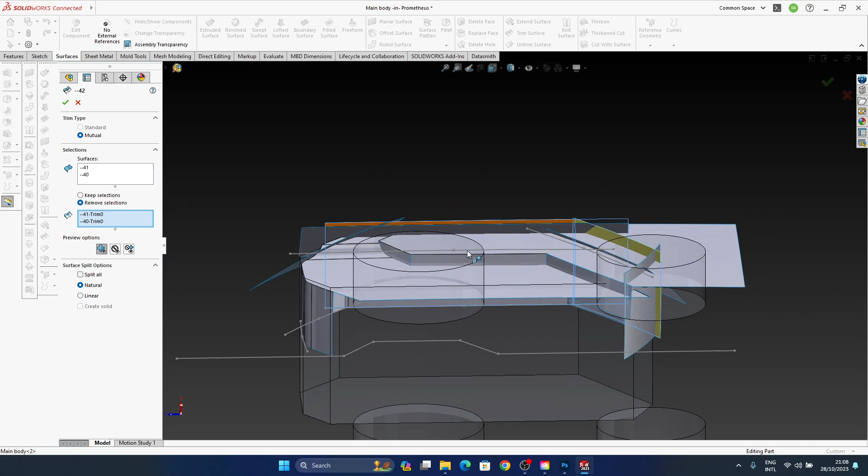So let's go again and see. This is correct. This trim is correct. I see. This trim is also correct. Okay. Yeah, that's good. And now, got it. So let's make a clear selection. So I want this one removed, this one removed, and that one removed. Good. So now we should be all right. Let's see SolidWorks. Are you happy with it? No, still not happy. Okay.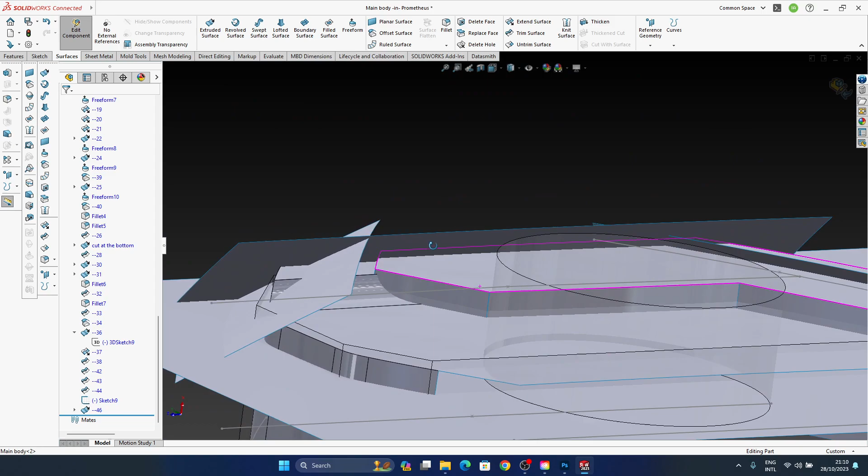Okay, so that's interesting. And I can see it is identifying gaps from those extrudes. Okay, so then, so we don't lose much time for such things, let's not apply any draft. Of course, now it's detecting things differently, but as I can see here, it's getting confused because of the draft. Or I can say maybe 1 degree. I just don't want it completely flat. So let's see, at 1 degree. There you go. So at 1 degree, it does identify everything joined together nicely.

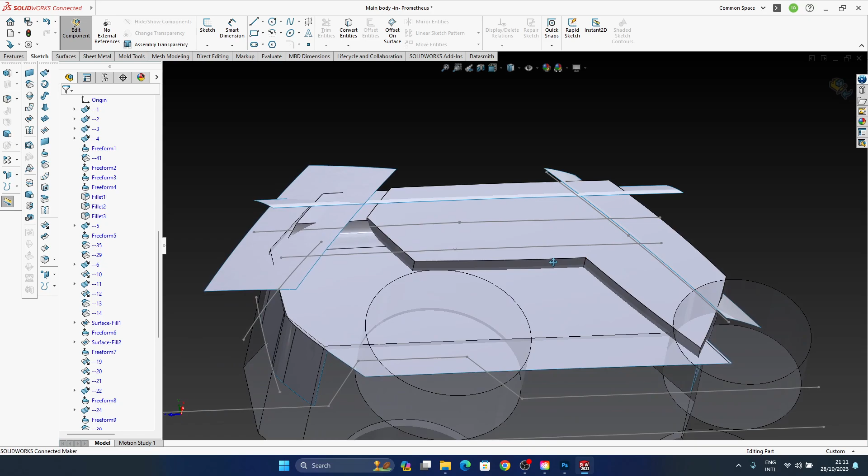All right, lesson learned. If you have drafts that are not 1 degree, then it would be far better to make the surfaces separately instead of one sketch at an angle, with an extrude at an angle. So now it should say that it is all good, and it is indeed all good. So all I did until now was so that I am going to combine it with the other body or solid that I have.

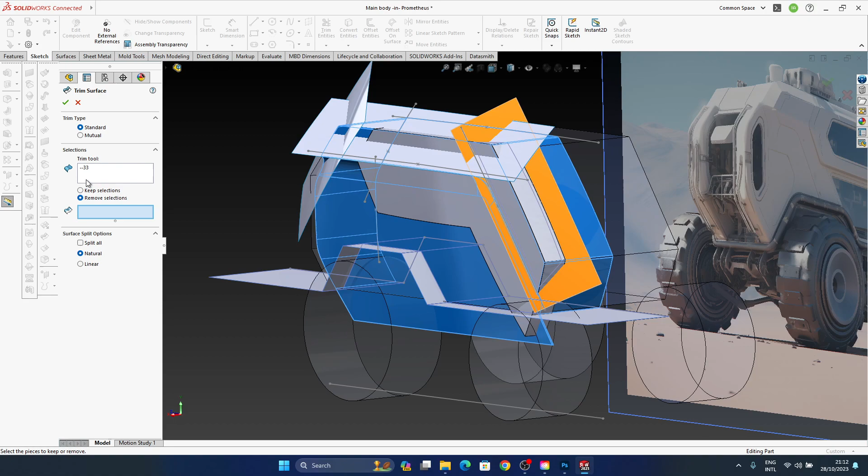But there is one problem, however: this one is completely open and this body that I have in here is not. So when I try to cut it out, it's not going to work very well. So what I can do is to cut this one as well with the same plane that I used in there. So I was having this cut at the bottom, isn't it? So I can use this as a standard, cut this, not trim tool, my bad. This is the trim tool, so I would cut this and cut this, yeah. So all of them cut by this.

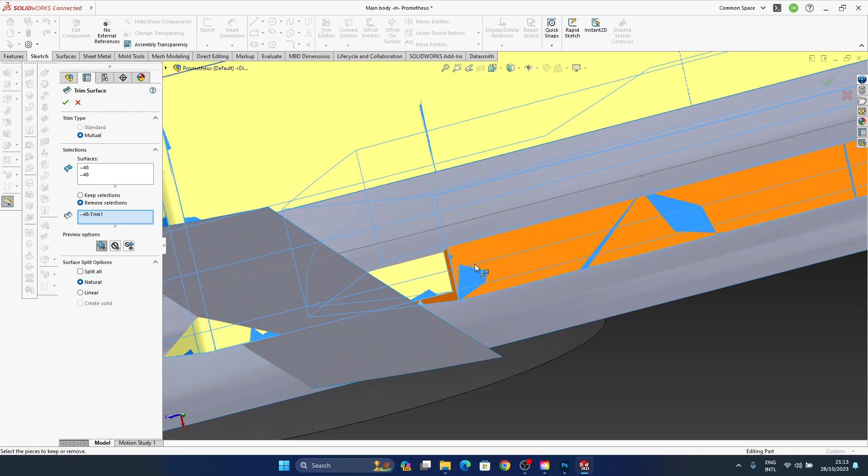Now we may be good to go, we shall see. Okay, so then I go and say mutual trim between this and this. Okay, and with a bit of luck, we should be able to eliminate the surfaces that we don't need anymore. So which surfaces we don't need? So we don't need that one inside, right? The step in here is good, so we keep the step. It may not work, by the way. SolidWorks may not know how to deal with surfaces that are identical.

But let's try. So we don't need that one in here either. And I think that's kind of it, isn't it? So these are the only ones that we don't need. So right now we have a shell with a step and everything done correctly. Now, moment of truth, and I'm going to save this thing first.

Or save all. Yeah, I'm going to save this because I'm not sure how SolidWorks will behave. So I had this in here at an offset of 20. So now I will want it to be at an offset of 0. Come on. And it does not allow me. So I will go and force it out to be at 20.

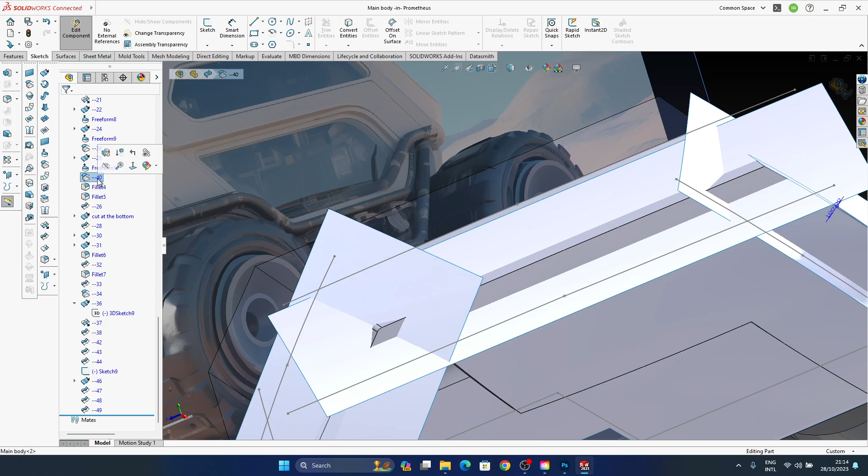Right, where are my offsets? So I'm having one in here. Any other offsets? Where is the one for this one in here? Ah, 41, yeah. So I'm going to say in here 0. What does it say? Let's see if SolidWorks will remember. It does not remember when it does the cut. There you go. So SolidWorks will say, I'm so sorry, but I cannot really do it like that. I cannot do the trim.

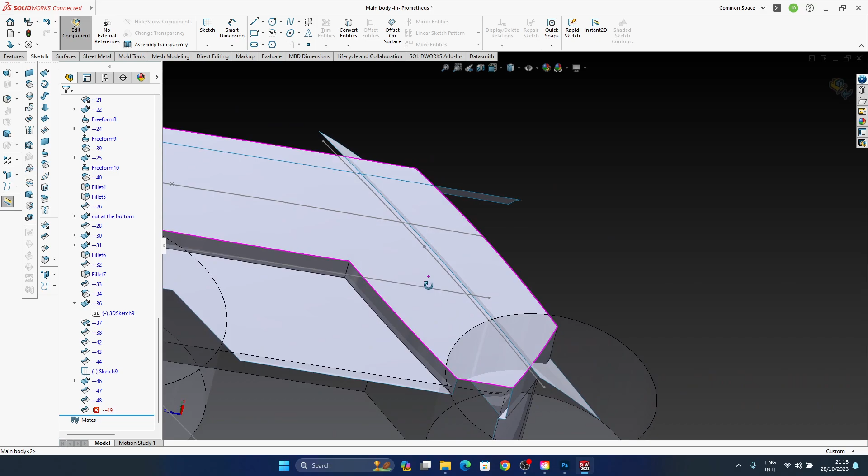Okay. So SolidWorks does not have the ability to see surfaces that are on top of each other and consider them identical. Now it's known. Not too much of a big deal. It's just that it will force us to do some more other operations on top of whatever we did until now. So, for example, just going to cut this once more with the surfaces that we had in here and so on and so forth. But that's not necessarily a problem.

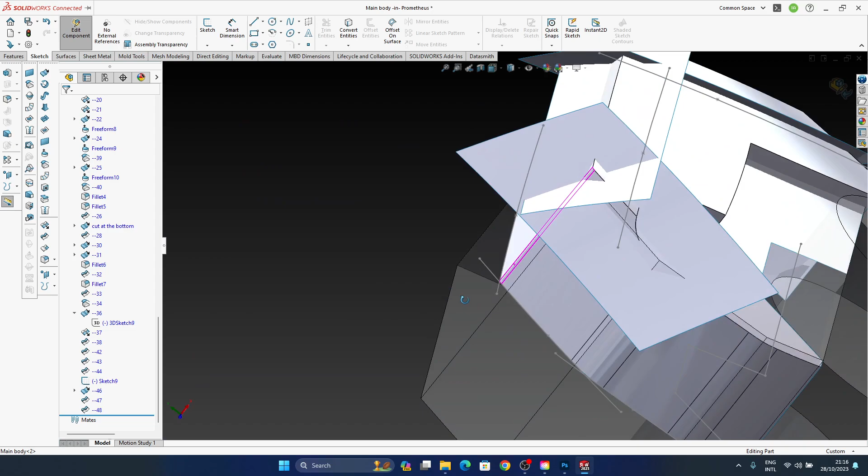Now, thinking about it, instead of doing what we did before and cutting other surfaces again and all that, we can always use this as an input to cut, isn't it? In the main body. We could also treat them as solids, and then SolidWorks should be forced to recognize, but that will take a lot of time.

That's fine. So for tonight, because anyway it's the time to go, let's make the joint, the trim between the two. We can always continue next time with the surface, with having this at the same value and all that. But I can at least do the trim and show you how it goes with those chamfers in there, so that you can see how it looks. All right.

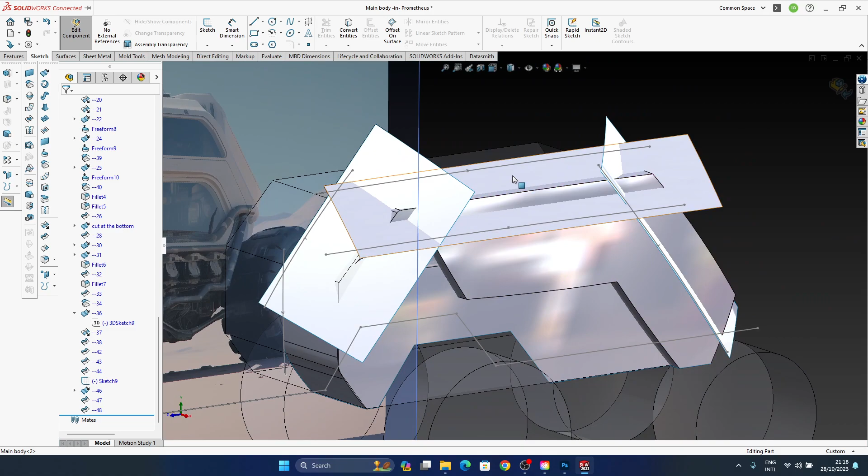So if we are now just imagining that this would be at the same, or actually, yeah, let's put them at the same, let's put them in 0, and I will find a way to force it out. I think the trim is, no, it's fine, yeah, okay. So it should allow me to go in 0. Yeah, so I will keep at least that one to 0, and do the fillets to these ones back again.

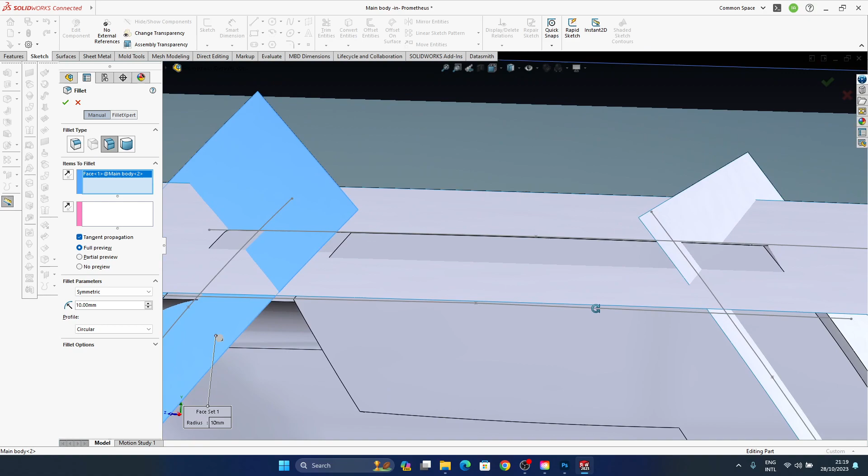Okay, so between this and that, how much? 50 millimeters, 100 maybe, somewhere like that. Yeah, I deleted them. I'm still thinking if I need them as fillets, or if I want them as trims. Probably by continuing doing the thing, we will figure it out.

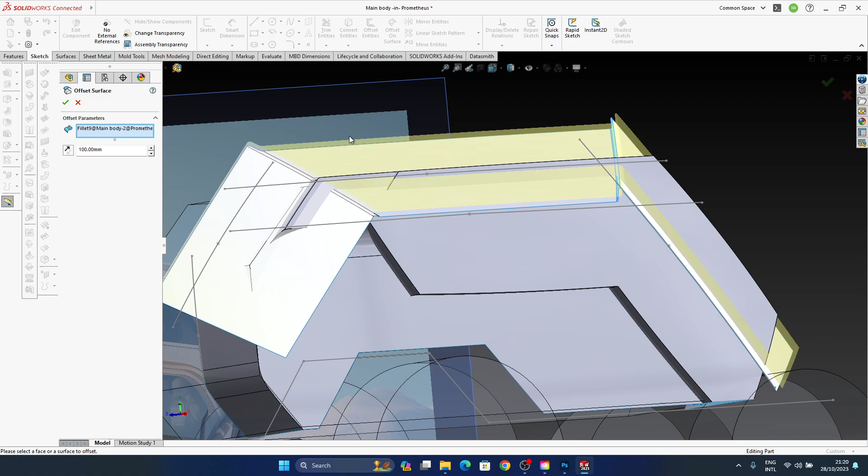But yeah, anyway, so if I am using the same surface in here, the same things, I should be able to, okay, so clear selection. If I'm having the last fillet selected and I say offset, it should offset everything. So yes, it does. So offset in 0, which is copy in SolidWorks. So now I'm going to finally trim these things together. So for example, this with this, and remove this and that.

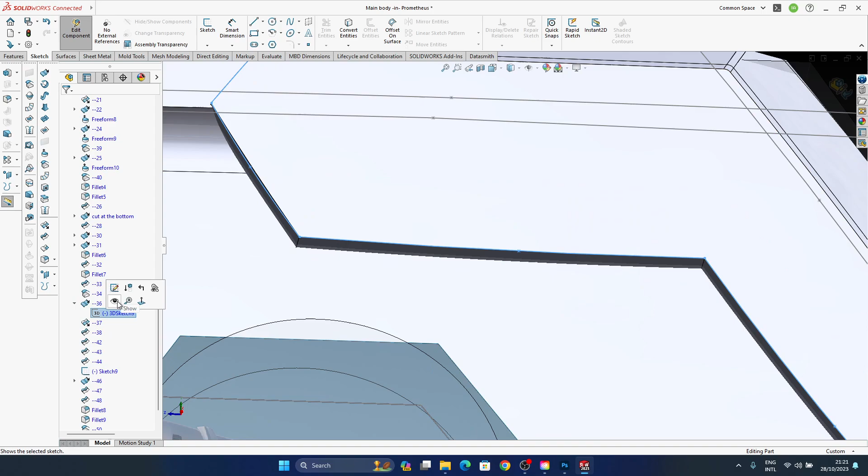And now I am going to do exactly the same for this. And if they would be solids, I have a very good feeling that SolidWorks would consider both surfaces as one. But because we are having them as surfaces, SolidWorks will give us some issues. So anyway, now given that we have everything created in here properly, then we can always go and again readjust things around, just like we were doing in the past.

And that's the power of having a system done in such a way so that you can go and be flexible and adjust things. It's really, really nice to have that, especially dealing with designs that are not very well defined from the beginning.

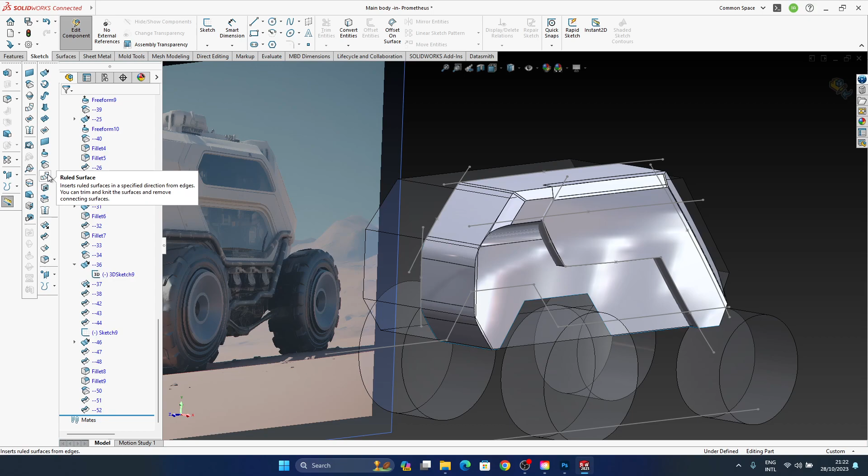So yeah, if I'm making a symmetry right now, just to have it as a last thing done, we should be just fine. Just searching for symmetry. Yeah, it's mirror, not symmetry. So bodies to mirror this, and right plane, it will be this, and that's kind of it. So that would be our little buggy.

So the next video will discuss how to deal with the surfaces that would be at the same level and identical. Probably I will see which solutions would be the best to not lose the time. And yeah, I hope it was useful.